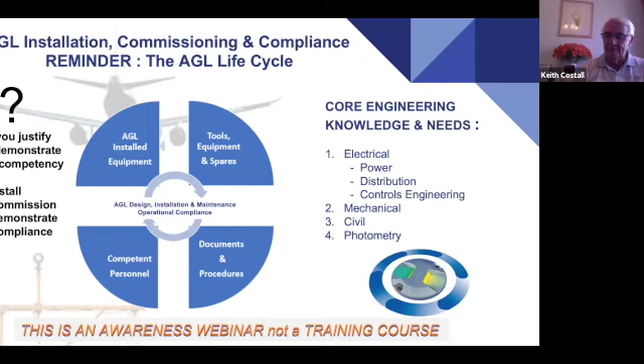So let us look at those engineering technologies, the civil, mechanical, and electrical engineering technologies, and understand this electrical system is different from conventional electrical circuits. When we've all done our electrical engineering, we're talking building technology, we're talking constant voltage. And then I come along and we say, okay, you can now work on the airfield because you're an electrician. Yes, but it's different. Why is it different?

It's constant current. And constant current is fundamentally different. It's a series circuit, not a parallel circuit. It's not a series parallel circuit. It's a series circuit. All the equipment that we put out there has to be watertight, and we all know that clearly water and electrics don't mix very well. And in most of the world, a standard connector system is used to connect the different parts of the cabling, the system that we put together at installation.

Now, what is really important, having that basic understanding, is who actually does this work? The people, again, the competency side. Because it's very difficult commercially when you're bidding for an installation and commissioning job on an airfield. There are two parts: there is the engineering submission of how you're going to do it, but there's the commercial submission. And many times, from some of the experiences, and I'm going to show you this, the person with the lowest price is not necessarily the best guys or girls for the job. And I'm going to show you why during this discussion.

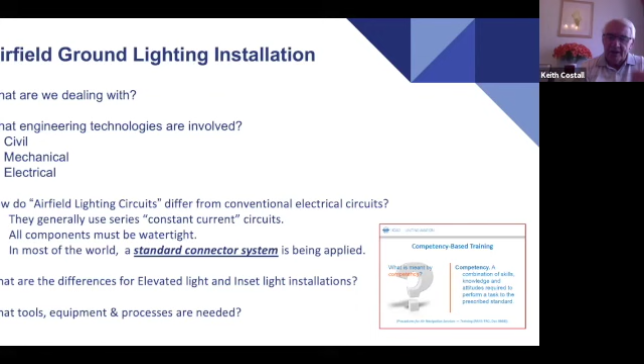We've also got to have an understanding that there are differences in considering elevated lights, that is a stick above the ground, and the inset, or shall we say, in-pavement lights that we put into the pavement. In this webinar, we will concentrate on discussing the in-pavement, the inset light installations, and also what tools, what equipment, and what processes and documentation we need to do that. So this is the emphasis of what we're going to be talking about this week.

So let's remind ourselves what an AGL electrical series circuit is. It's a power supply. We get a constant voltage power supply to the substation or vault. Then we have to convert that to a constant current output to go out to the field. And in the field, we have a single cable, series cable, all the way around the lighting circuit, back to the vault or the substation, to where the constant current regulator is. And so let's have a look at that.

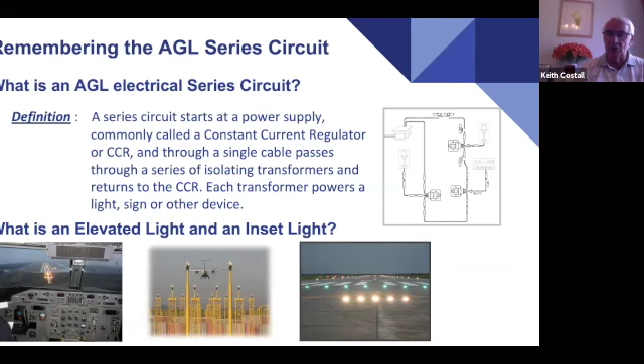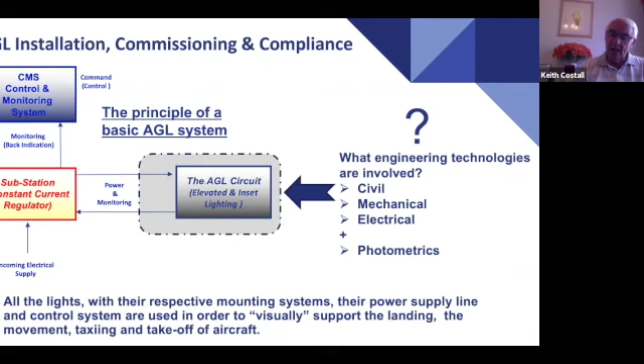So let's put our AGL into little blocks. What's physically there? Well, we've already mentioned in the vault, in the substation, we've got the CCR, the lightning arresters, and perhaps an output disconnecting device. That is not part of our discussion today.

But we have the primary cable, which may well be screened or unscreened. We have the primary connectors. That is those common, widely, internationally used connectors. It could be a plug and socket, but it also could be a through joint, an inline splice.

We have isolating transformers, and within the primary circuit is the primary winding of the isolating transformer, whereby on the secondary side, on the secondary circuit, we have the secondary winding of the isolating transformer. They are separate circuits, basically. The primary and the secondary circuit are electrically separated, only joined together by the series isolating transformer, which is a one-to-one series current transformer.

To get the power from the transformer out to the light fixture, we have the secondary circuit, the secondary cable, which could be a 2-core or 2 single-core cables. And then again, we have to connect this cable to the transformer and to the light fixture. So we have secondary cable connectors. And again, it could be a plug and socket, mostly is a plug and socket, but it could be a through joint.

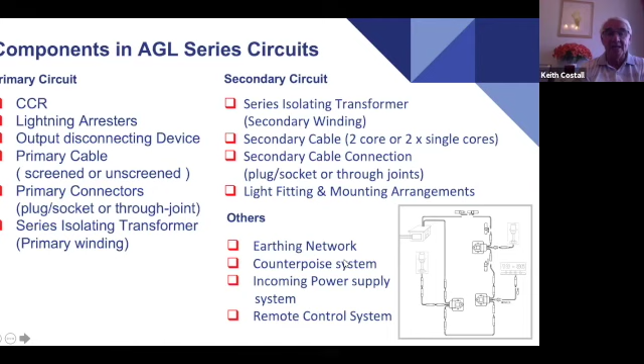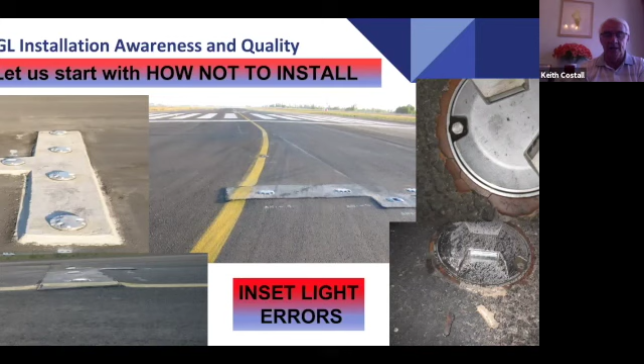Remember Concorde in Paris, when a piece of FOD fell off an aircraft, and then Concorde followed, and that FOD then damaged the aircraft and it crashed, and all people were killed.

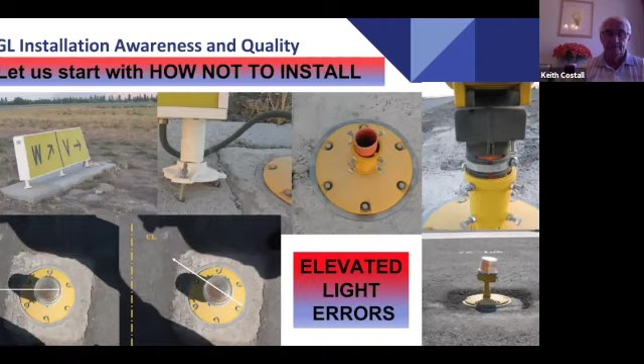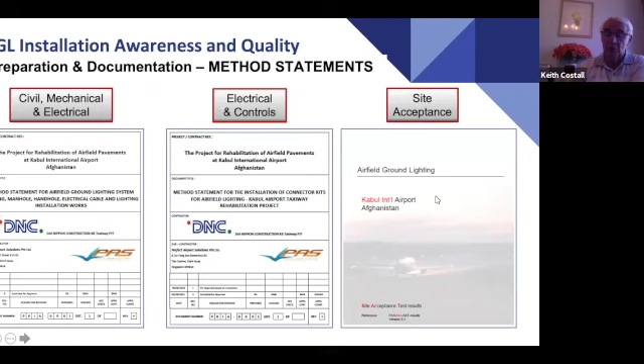This is Kabul in Afghanistan, and the project was a Japanese main contractor with a colleague, Perfect Airport Solutions of Singapore, as the AGL specialist installation and commissioning contractor. So just to expand that a little bit, I put those three documents there, front page documents, but extracted out of the civil, mechanical and electrical method statement just one paragraph on the scope, setting out the excavation, cable trenching, the manholes, that is the transformer bits, and of course installing the lighting system.

And on the electrical side, I selected out one of the paragraphs, the equipment that they used on site, which is a whole range of equipment and what is being used to be able to install a taxiway project.

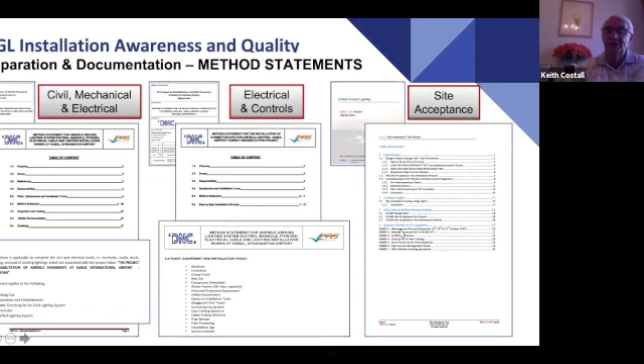And finally, an extraction out of the document we use for the site acceptance, which says how we're going to demonstrate in this particular project the substation equipment, how the taxiway lights were going to be demonstrated and what we did and what measurements we took, etc., and the control side, and the details of the actual measurements and demonstration of compliance in a set of annexes.

So moving on to the civil side. Let's have a look at the civil side, starting there. We're concentrating now on inset lights rather than elevated lights. The same scenario exists for elevated lights, but let's concentrate on inset lights. Let's have a look at the loading capacity, because in civil, it's the construction, the operation, and the maintenance phases we have to take into consideration.

But of course, the loading capacity is very important, because our aircraft is going to land or run over the pavement, which is also going to run over our light fixtures. So we need to have an understanding of the loading capacity on the pavement and how it affects our AGL. But also from an operation and maintenance phase, rubber removal. So that's another factor. We get rubber, and we've talked about that in other webinars.

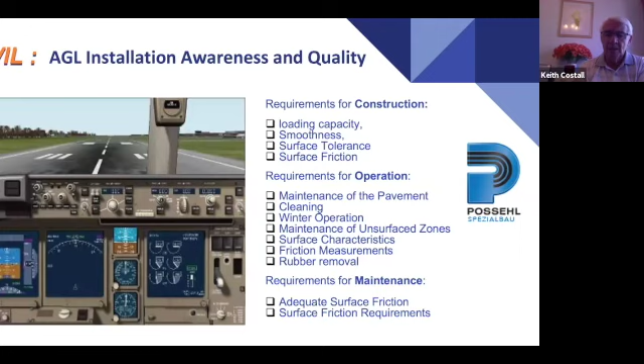So moving on to the loading capacity, and I'll just concentrate on this one only, not on the other three. There is the ACN PCN factor. So we as electricians have to have an understanding about this civil requirement, because the civils do an excellent job to install a pavement structurally strong enough to withstand aircraft loads. The loads from the aircraft are dynamic load, horizontal shear and a turning moment, and then there is the aircraft classification. It has a number.

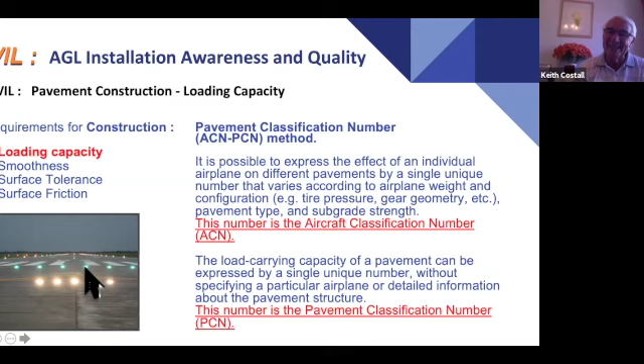So types of aircraft will have an aircraft classification number, and the pavement itself will have a pavement classification number. So it's a classification system. So the ACN, PCN, we need to understand that, because as I said earlier, we've got a beautiful pavement that the civils have done a job on, and we're electricians, we come along and for an inset light, cut a hole in it, weakening the structure. So let's have a little discussion about that.

But how do we install inset lights? Two ways. One, through deep bases. Two, through shallow bases. In the US and in the FAA-related or US military airfields, or those areas associated with FAA standards, they will adopt deep bases. The rest of the world, most of us, will use shallow bases.

So when we're looking at deep bases, there are two types. There's load bearing and non-load bearing. Load bearing, obviously in the pavement, that's called an L868. And there is a non-load bearing for those areas where the aircraft do not run over, that's an L867. But when we look at the L868, there are two types. There's a solid type, which looks a bit like that, and there is a sectionalized type. Now the solid is for concrete, rigid pavement, whereas the sectionalized is for flexible pavement, asphalt.

Because concrete pavement is installed in slabs, big slabs, with expansion joints in between, whereas the asphalt is done in layers. And therefore, to install a deep base in concrete, you have to be working with the civils very, very early, because you need to get it correct at the top, at the surface.

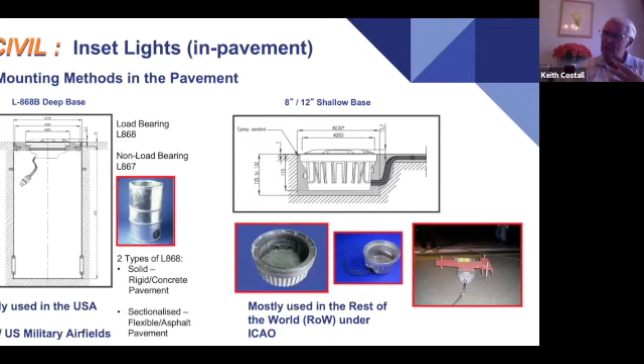So we've got this wonderful pavement that the civils have done a smashing job on, meeting the ACN, PCN factor, and we come along and cut a hole in it. And when we cut a hole in it, we're going to put a foreign body in. And this foreign body is aluminium alloy, mostly. And we're going to put it into either concrete or asphalt, a different body. So we are going to have to glue it in there somehow. So we're going to use resin. We'll have a little talk about resin in a moment. So that's the criteria that we have to consider. We have to have this civil engineering understanding and knowledge associated with it.

So the grout itself: there are many types of grout out there in the market, and in different locations around the world, people use different suppliers, different types of grout. But remember, the grout is the fixing of an AGL light base into a pavement, be it concrete, be it asphalt. And so the grout itself must adhere to differing surfaces, right? Aluminium alloy, concrete, asphalt, for example. And it must be structurally strong.

So we have to make sure that whatever grout is used is going to hold that light base in the pavement when all these aircraft loads of dynamic load, horizontal shear and turning moment are placed upon that light fixture. And it must be able to accommodate deformations of the surface, because in horizontal shear you get the wave effect, which means that the pavement itself will move within its Young's modulus of elasticity and then return back to its original state. If you go past its Young's modulus of elasticity, it will stay deformed. And so we've got to be able to move with the pavement and return back. So the grout must accommodate for that.

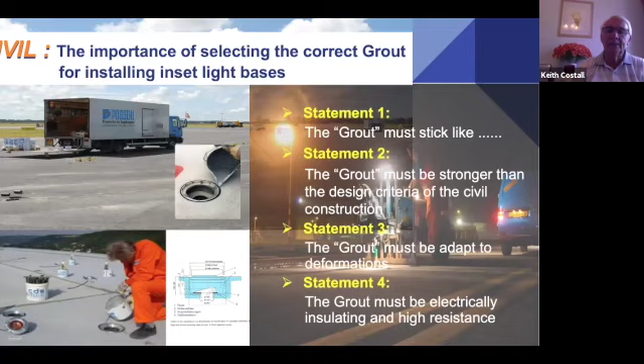And so moving on, here's a little diagram, and I've taken this from an installation training course that we do, and the installation training course is done in cooperation with Possehl, Germany, and Possehl are experts in top coats and installing AGL in the civil engineering. They produce the resins themselves, so they have an epoxy-based resin and different types with different applications, etc. And here is just a picture of a diagram. It's purely a diagram, just for explanation purposes.

We've cored a hole. We've put a base unit into that hole, having aligned it straight and level and according to the surface. And then we may adopt different kinds of resin applications, depending on where we are, what pavement it is, etc. So there is a complete range of options. So this is done in practical terms on a training course.

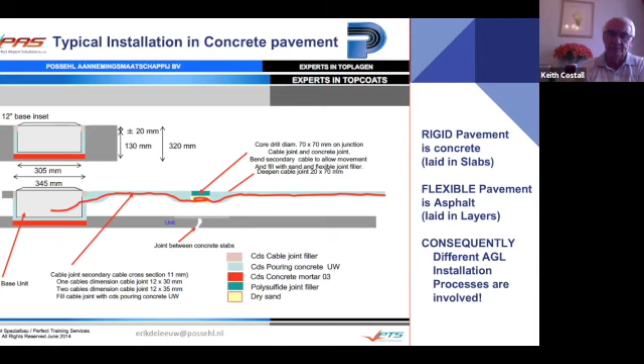I've shown this with concrete pavement. If it's concrete, it's done in slabs, then we have expansion joints. So having decided how we're going to get our secondary cable out to the lighting fixture, if we do it, for example, across a joint, we have to accommodate for that joint. Here I've shown it with a saw cut, and we can't just put our cable straight across a joint. Why? Because when the joint moves, it would break the cable. So we have to accommodate for that. This is just a diagrammatic example. And when you do an actual practical AGL installation training course, then we do these kind of things.

Moving on, when we core a hole, we have equipment to core a hole, and we have to have some knowledge of what coring bit we use. Here are some pictures of coring bits, and on the surface of this cutting edge, these are diamonds, and they're very, very hard. But the key issue is you've got to put these coring bits onto some kind of drilling jig. So there are mobile drilling jigs, and there are drill carts.

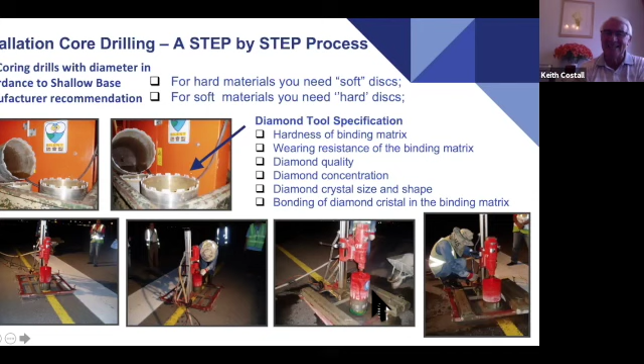These are three pictures from Brunei, on the island of Borneo, the Sultanate of Brunei, the Brunei airport. And this is a project. But the interesting thing about this is this was an electrical powered mobile drilling rig. Once you've worked out exactly where you're going to core the hole, and you use the correct diameter coring bit, if you do not fix it to the ground as a portable unit, or put big weights on it like is shown here, when you turn the motor, the core will stay steady, and the whole assembly will twist. So you have to have this understanding of how to use the equipment.

Likewise, if you've got a drill cart, and these are pictured and supplied to me by Possehl, they, in fact, have their own design of drill carts, and they are self-leveling, etc. However, they do also utilize electrical and/or hydraulic portable mobile units for overseas work. But very, very expert in the installation of AGL and the tools themselves, plus the grouting. So, you know, it's a package. So we will do installation courses in cooperation with Possehl.

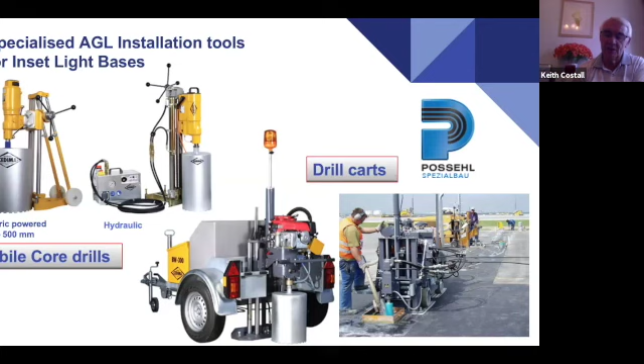But let's go back a stage now, and we've shown this diagrammatic picture again, and we've cored a hole. We're now going to put our base unit in, but then it's hanging in space. If we want it straight and level, transversely and longitudinally, and at the correct height according to the surface of the pavement, then we've got to hang it in space. So we need some kind of jig to hang it in space, and then we will align it, and then we can put the resin in to glue the base unit into the pavement at the correct height, at the correct orientation. Just an example.

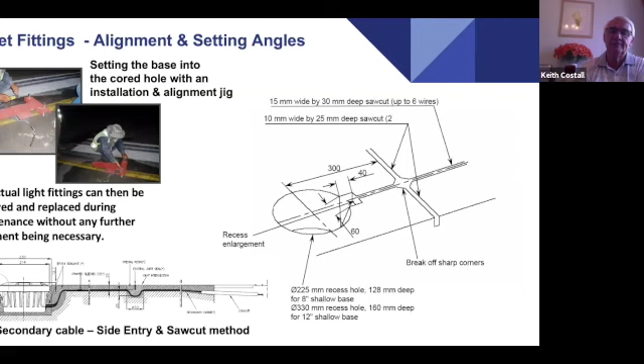Then going on to the electrical side. On the electrical side, we've got the primary cable, the connectors, the isolating transformers, the secondary cable, and here's a list, and you can have a look at this afterwards. I'm not going to go down this whole list of its 6mm squares XLPE, which is cross-linked polyethylene type C.

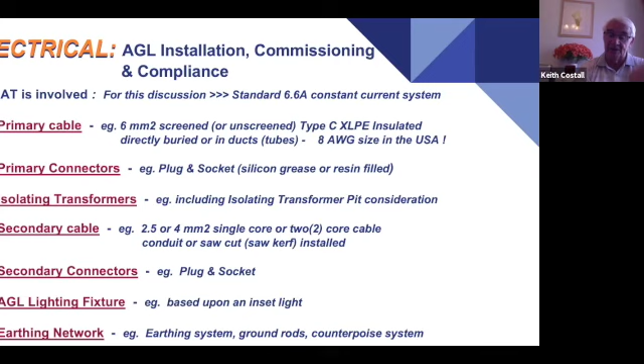Without going into all the detail, these are the things that we have to look at from an electrical viewpoint. Are you competent? Do you have knowledge of all these elements as an installation contractor? And going back to the fact that we've got to demonstrate compliance as well. So if you have installed a series cable, which is capable of carrying 5,000 volts at 6.6 amps, you've got to check its insulation resistance and continuity resistance.

And so we check the insulation resistance using a 5,000 volt insulation resistance tester, commonly called the megger test. But if you've got a brand new circuit, and this is an ICAO Aerodrome Design Manual Part 5 definition, for a brand new circuit, that is cable, connectors, transformers, then on the primary circuit, once only, we test it at 10,000 volts, and once only. Thereafter, 5,000 volts to demonstrate.

Now, we've got to define what the insulation resistance value is after installation, before handover, as part of the site acceptance. And the nominal, I'm not saying you have to do this, but the nominal figure is around 2 gigohms that we expect to have insulation resistance on a brand new circuit.

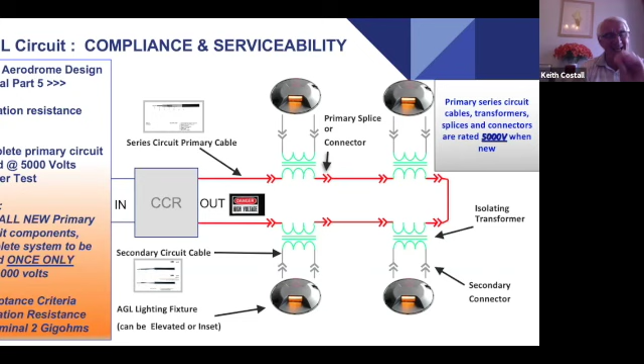ICAO define a minimum acceptable level, and it's calculated according to 2 microamps for every transformer and 1 microamp for every 100 meters of this primary cable. So that's the criteria. But we define that in our documentation. We need to be really clear right at the beginning. So that's the AGL electrical primary side.

Looking at the cables themselves for the primary side, 4 types, type A, B, C, and FLYCY. Most around the world is type C, XLPE, cross-linked polyethylene. And it can be a screened cable, which is mostly the rest of the world, and the US and some of the other areas use unscreened cable. But again, it has to be tested, and the criteria for testing is no different.

But we need to not just do a test on the insulation resistance for water tightness, safety, etc., and that it's all been installed correctly. Then we also need to do a continuity check to make sure that we haven't got a high resistance joint out in the field. So on average, a type C XLPE single core primary cable will have a little over 3 ohms per kilometer continuity resistance. In fact, some manufacturers define it exactly. For one particular quality manufacturer, it's 3.11 ohms per kilometer.

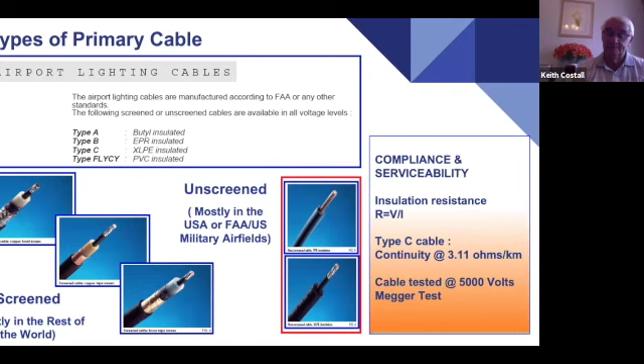Moving on, the connectors themselves, it's an international standard, as I mentioned earlier. Then there are different types, primary and secondary connectors. There's different classes. One is for molded onto the cable, and the other is for the field. And then there's all the different styles, plug, socket, etc. So screened cable, unscreened cable. So a whole range. So we have to select.

You get them as a kit, and I would recommend you get them as a kit because there are manufacturing tolerances in different manufacturers. So be very, very careful. And there are two basic types of connectors, those that get filled with resin and those that get filled with silicone grease. And that is part of the water tightness, not just the manufacturer and the sizes and the insulation, etc., but also how we secure and make the internals of the connector, once put together, watertight.

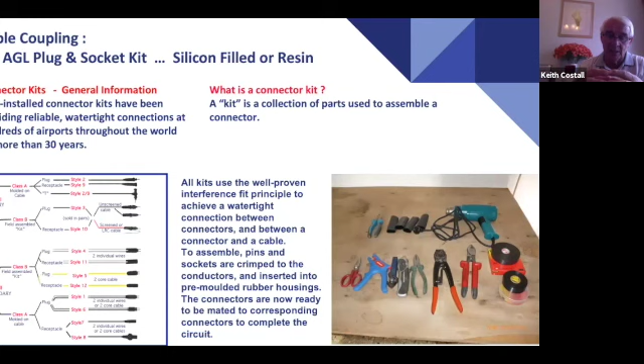The isolating transformers themselves, they also come molded. They come with long leads, and some of the issues associated with installation is that we misuse them. Who of you out there, and be honest to yourself, not to me or anyone else, how would you carry an isolating transformer? I bet a lot of you carry them by the leads. Then you are potentially damaging the water tightness there.

They are tested normally at 3 times the operating voltage under power. That means if it's designed for 5,000 volts, then they're tested at 15,000 volts under power, underwater. So we know that they're very good when they leave the factory. It's the installation contractor that creates a problem, hence competency.

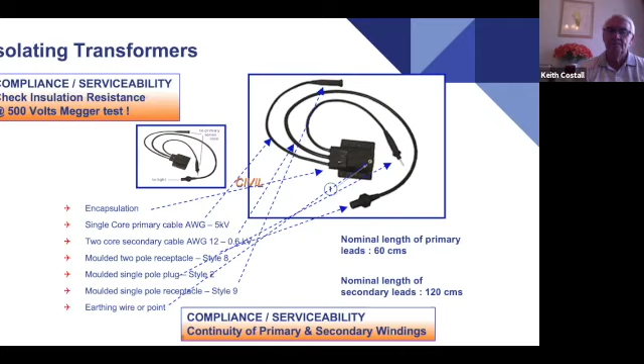Here's some pictures of projects, because we've also got to set out and do transformer pits. And here, look, is a picture. This is again from that taxiway project in Kabul in Afghanistan. And here's some ducting where the cables are in, and with transformer pits. And some can be manufactured on site, others have to be lifted in depending on the size and the requirement.

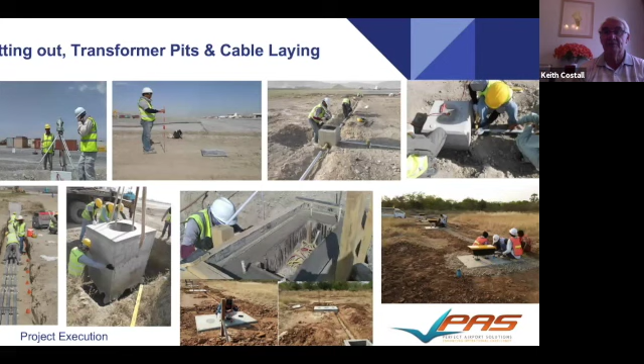The thing is, this is called a pit and duct system. Now, cables are designed also to be directly buried. So there are airports, if you go to the Netherlands, for example, and many airports, they'll directly bury the cables. But they're designed for that. But the pit and the duct system, sadly, becomes part of the airfield drainage system by default. So invariably, these things get full of water. So we go to a transformer pit out on site, and you take the lid off, and it's full of water. Hence, we have to be watertight.

Now let's go on to the earthing network. There is an earthing network, and generally speaking, the ohmic value is 10 ohms to earth, or whatever your national standard is. And we have to ensure that we have a common earthing reference all the way around, bare copper wire, and we earth them with earth rods. No requirement to say how many earth rods, as long as you can achieve and demonstrate your national standard or an international generic standard of 10 ohms to earth.

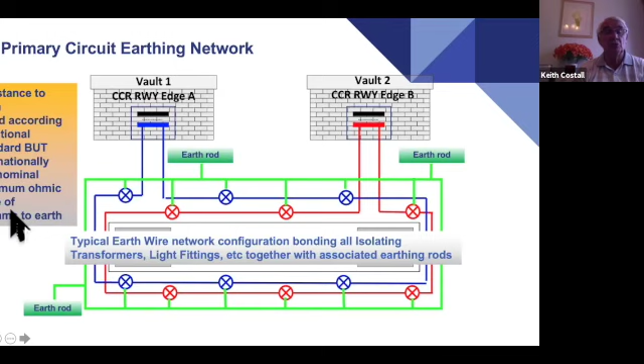Then moving on to the counterpoise earthing network. Now this is for lightning protection. It's a bigger cable. It could be a matrix of cables, like on a grid system, joined together. But it's there to protect the cable in the event of a lightning strike, which could induce a voltage into our cabling, which could then go back into our substation and blow up our CCRs and the electronics in the CCRs. So we protect it so that should this happen, then hopefully this will discharge the lightning to earth through earth rods.

And with a counterpoise earthing network, there we are defined. We must have earth rods in the field, and they shall be internationally no greater than 300 meters apart. Now, some nations have their own criteria for that, so just beware. So a counterpoise earthing network is for lightning protection, but an earthing network is for bonding purposes. And the cabling and where we install the cabling is different.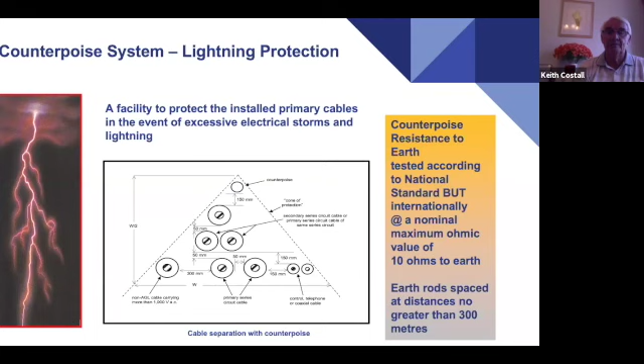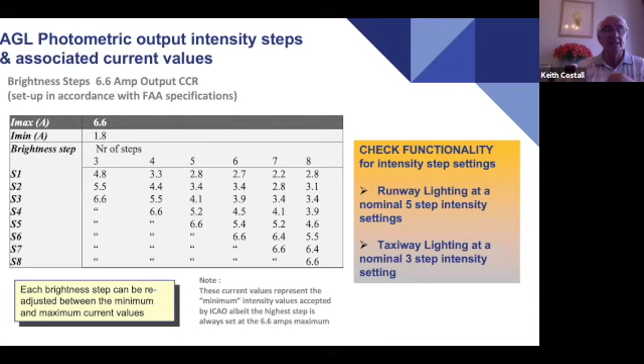But please note, these are current values at the lower end of the intensity percentage levels defined by ICAO, whereby ICAO in Annex 14 say 100%, 30%, 10%, 3% and 1%, 5 steps. These percentages are at the higher end, but the higher end at maximum is 6.6 amps, and there will be different currents for the higher tolerance than the lower tolerance. And these are the lower tolerance elements. Not many people know that, but we have to understand that and demonstrate that.

Which then leads us on to the mechanical side. And the mechanical side is to make sure that we are firmly installing both elevated lights and inset lights. And this is inset lights using an electronic torque wrench. Now, the electronic torque wrench is ideal because we can program in the light fixture. It will tell us what torque setting it's got to be. It will monitor the torque setting. We have to do it correctly, so it will know that an 8-inch fitting has got 2 bolts or nuts, and a 12-inch fitting has got 6, and we have to do them all before it allows us to move on.

Plus, we need to know exactly where it is. So RFID tagging is ideal for this, and it's accurate, as it knows exactly it's that light fixture, and it gets recorded accordingly. Some people say, oh, we can use GPS, but actually GPS, if you've got lights pretty close, such as a runway center line and a lead-off or a lead-on light, then GPS is potentially not as accurate. So RFID tagging, for me, is the most proactive.

And the beauty about the electronic torque wrench is you can prove that you did the job correctly. So if something did happen and a bolt did come loose, you can say, well, I did it. I've used the electronic torque wrench, we have the records, and it proves it, because you cannot finish the job until you've done it correctly. And this is really a safeguard operationally, but a safeguard to you as the engineer. Oh, mechanical, we have to understand this.

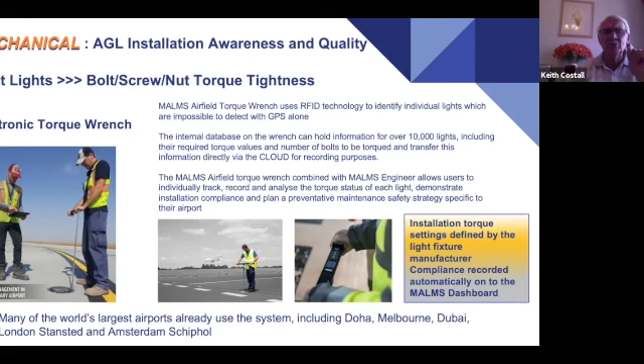It's mechanical engineering. And then coming back to probably the last thing, demonstrating compliance, doing a photometric test. Now, a photometric test, we're checking our lights in accordance with the isocandela diagram in Annex 14, but also if you want to know the percentages of light output, etc., we go to the Aerodrome Design Manual, Part 4, Chapter 17. And here is a picture of the mobile photometric tool MALMS, and it's being used here at Birmingham International Airport in the UK.

But that's a picture that is shown on the back page of Chapter 17 in the Aerodrome Design Manual, Part 4. And we are demonstrating compliance. And those records are kept at commissioning and can then be moved on to the maintenance people so they can check exactly what the photometric output is at final installation and commissioning, and thereafter it can keep records. So it's ideal for that aspect.

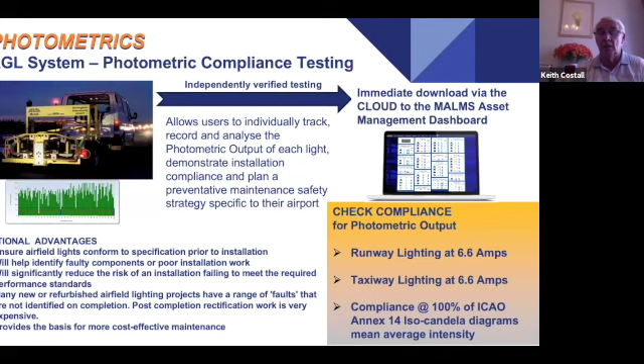And just to remind you, if we use the photometric tool together with an asset management system, then through the cloud, as we call it, these records are immediate and can be demonstrated not just to the airport, but to the regulator for compliance. So I just want to say to you, remember, serviceability is compliance. Unserviceability is non-compliance. It's as simple as that. And remember, you cannot manage what you do not measure. It's as simple and straightforward as that.